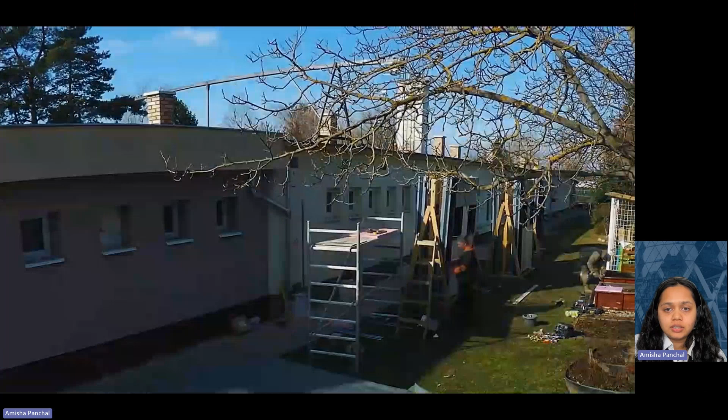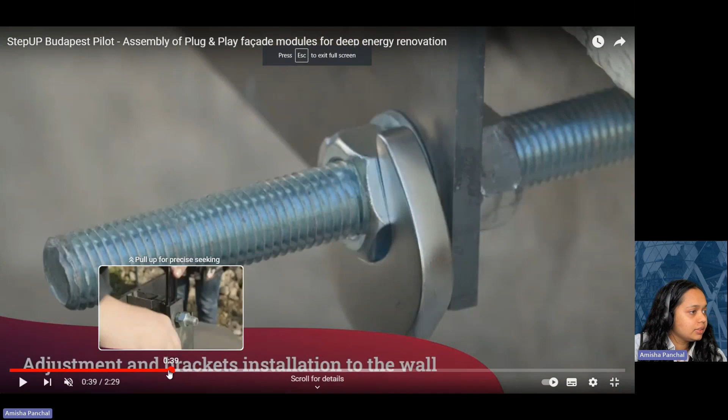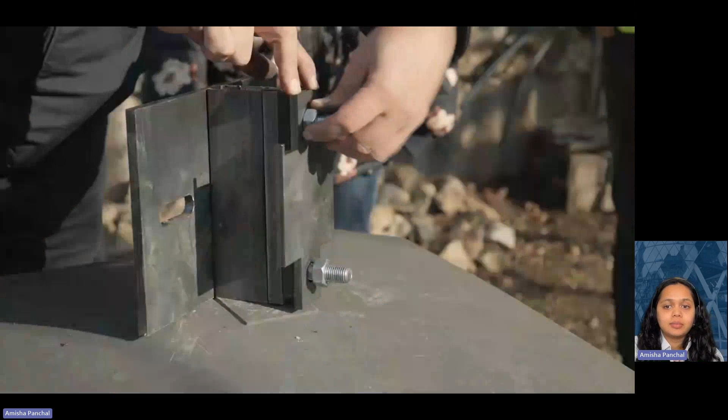The production of sandwich panels and ventilated facade systems already existed. One of our partners, Money Green Tech, already has an expertise in the light steel frame structures, and the combination of the two solutions was never studied beforehand, and it's innovative in the market. So this implies that it must be technically validated with prototypes, which was done in this project.

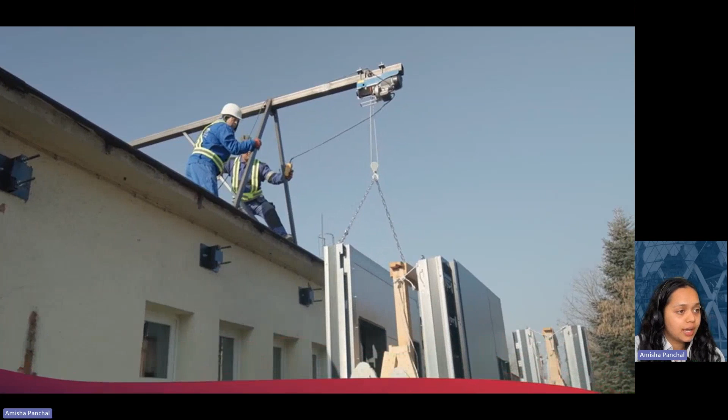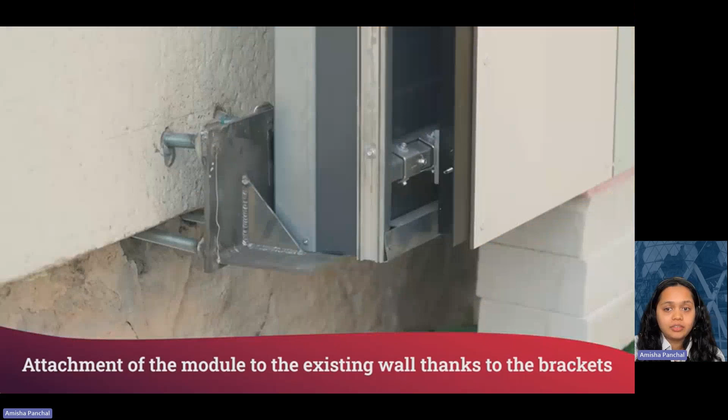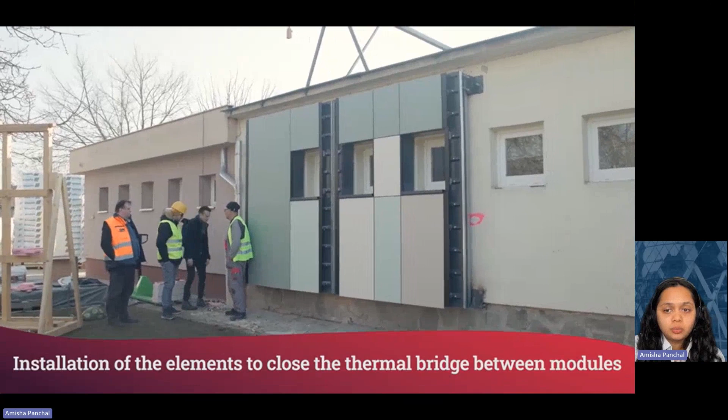This new envelope uses a structure that is provided by our partner Money that can easily be attached to existing slabs of the building without affecting its structural balance. The solution developed consists of the creation of highly customized, industrially produced plug-and-play modules. The two main elements of the solution are the anchoring system and the modular elements, which are the light steel frame structure, thermo-insulating sandwich panels, and an external layer.

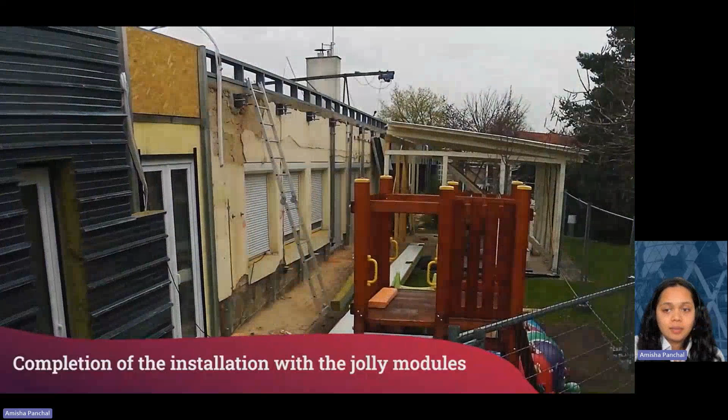The anchoring system has been deeply developed during this project, and it has defined a solution which doesn't only allow the horizontal, but also the vertical movement of the modules and also the adjustment in the direction of the facade. Monitoring systems or electrical or thermal systems with the piping can also be integrated within this facade. So thank you.

Right. So the next system is the plug and play active system. This uses an integrated solution with the phase change materials, like I mentioned before. And it's combined with renewables such as PV panels, commercial heat pumps, and advanced optimization and control logic to operate these charging and discharging of the tanks.

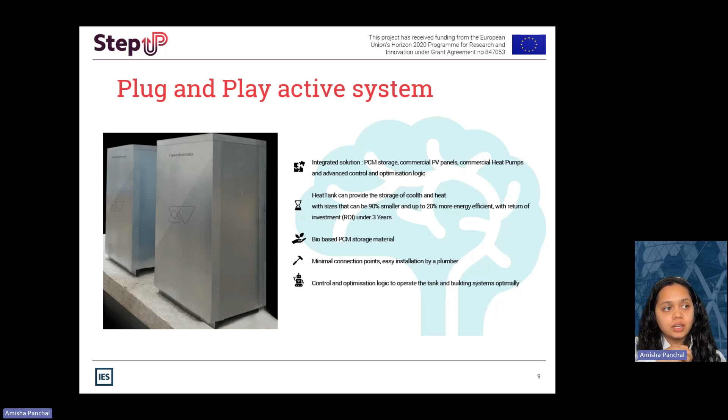The integration and application of these systems are being studied in the project and will be implemented on the pilot sites. And this is aimed to ease the installation time, the installation process, and the data intelligence supports the overall approach of StepUP methodology, which is very much focused on data intelligence throughout the renovation process.

The plug and play solutions are not as adaptable in the market without the technology provider clusters. So these are all the other third parties such as the solar shading and PVs and the heating systems that are already existing, which have the potential to be integrated within these plug and play systems developed in the project. So the integration of the passive systems in the plug and play module has been taken into consideration, as well as the active systems.

So these are suitable for integration with solar shading, windows, and potentially other passive systems. They can be also pre-assembled with or without windows, depending on the project requirements. Currently, we are also able to integrate foldable and adjustable blinds by another third party in the facade. And this kind of solution basically allows slats which can be oriented from different angles and can be moved up and down, achieving a total closure of the window if needed.

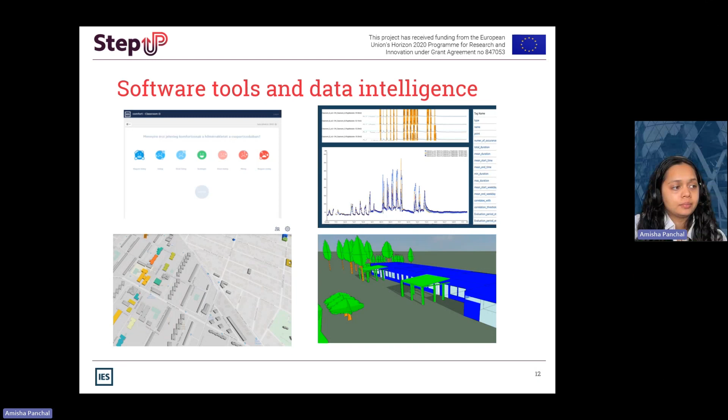Finally, the project develops the concept of smartEPC in deep renovation as an innovative financing model. But I don't want to give away too much information here just yet, as we have the webinar dedicated to this topic. So I will allow this to be discussed separately.

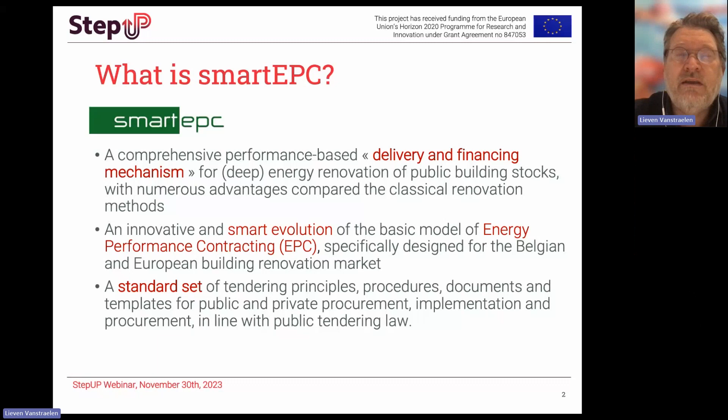In that sense, it's an evolution, a smart evolution, if you want, of the energy performance contracting model that has been around since the mid-80s and mid-90s, even in Europe. But so we added certain features. And what we also did is standardize a lot of the tendering principles, the procedures, documents, and templates to make things much easier, basically.

Technical specs have to be developed to be able to do a public tender or a tender in general. Then measures are being implemented and rolled out. Often they do not include maintenance, so you have to have a separate maintenance contract with a maintenance company. And then if you look at the follow-up, well, very often there is no real follow-up. How much is being saved, if any.

And even though the customer typically can be assisted by an engineering company, you still have all these separate steps with different actors involved, different contracts that you have to find. So there is a lot of lack of alignment between these different steps, and there is no knowledge transfer very often between the parties. And very often, or let's say almost all of the times, nobody is really taking responsibility for the result in terms of the energy savings.

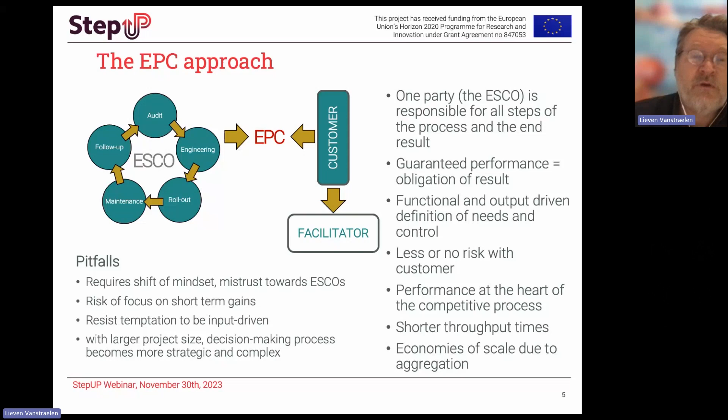So if you look at smartEPC, it's of course EPC, everything around energy performance. But then we've taken it a bit further. First of all, we've defined a whole set of different key performance indicators that the ESCO has to comply with. Has to do with energy, but it also has to do with comfort levels. It has to do with security. It has to do with documentation, with the condition of equipment during and at the end of the contract, and so on.

And basically that corresponds to a fixed price that the customer is paying every quarter or every year to the ESCO. And typically there are energy savings that are then managed with a bonus and a penalty, a bonus and a malus. That's classical for EPC, but we've gone further, also allowing to make the comfort performance bonus malus based. Also building certification, for example, BREEAM or LEED certification, setting targets for a certain level of improvement.

And then we have developed out of the maintenance mechanisms the capability of defining a building value. It's like an in situ building value, a technical value that is being calculated based on the condition scores of the maintenance program, and that allows also then to steer on this building surplus value, aiming for a higher or lower rest value. Basically, that's what it's all about. So these are some of the elements that in smartEPC have been added to the basic EPC model, with different bonus and penalty performance payments.

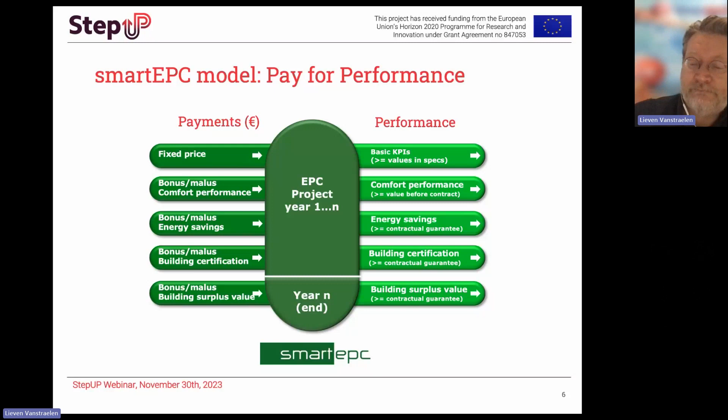So why is smartEPC different from other EPC models? And maybe a few more words on that. As I said, in smartEPC, also the maintenance has been designed to be performance-based. Classically, maintenance is also done with input specifications. So the customer specifies a whole set of things that he thinks need to be done in terms of maintenance. And we figured out that that was just not a good way of doing it. And so we went shopping in the Netherlands, where a standard was developed several years ago, the NEN 2767.

And so, as I said, it works with condition scores. So every element in the building gets a condition score based on this standard, on this norm. And then the ESCO, which acts as maintenance company, has to deliver a certain condition score ranging from 1, which means a very good condition, to 6, which is a very bad condition and you have to replace the elements, throughout the whole ESCO contract. And that's a significant difference. And it also leads, of course, to much more proactive maintenance, and of course also the corrective maintenance if needed.

It's also very much designed around and based upon total cost of ownership. So we're not just looking at costs. And also in public tenders, very often, public users will focus on how much something costs. We're not doing that. We're looking at the costs, investments, maintenance, maybe financing costs, but we're also looking at the energy savings. And it's the total cost of ownership in terms of the costs, and then the benefits, which are the guaranteed savings. And we're looking at the full picture over the life cycle of the project or even the life cycle of the building.

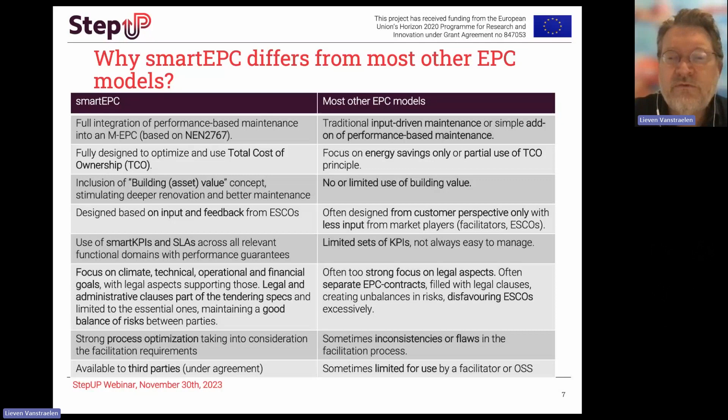Another part is that all the administrative and legal aspects are serving the goals of the performance contract. And so we integrated those into the specs, rather than having a separate legal contract, which often then turns out to be a big hassle for parties to agree on. If you have 100 pages of legal clauses, that doesn't work very well either. And there's a strong process optimization that we try to get into the facilitation process.

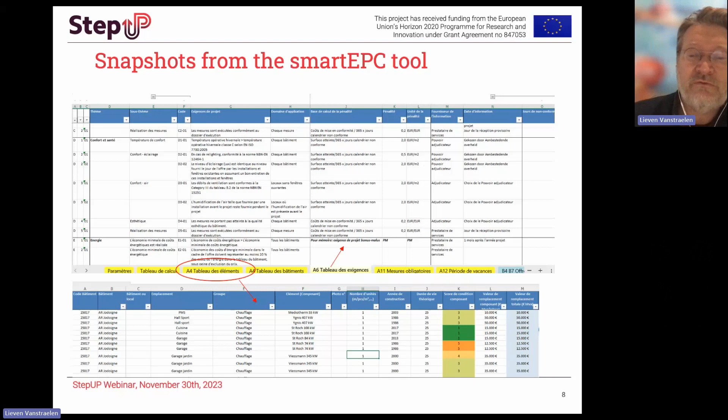So what are and have been the challenges for deep renovation? Because that's what we try to do, of course, in StepUP, is go also a step further. We had some experience with deep renovations, but not so much yet. And the first one is to integrate the architectural and material requirements into what is, as I said, basically a functional and a performance-based specification.

When you replace a boiler by a heat pump, the idea is that you're not so much concerned about what this heat pump looks like and which specs it has. It's important that the energy savings that the ESCO is guaranteeing are there, and that the comfort is being delivered by the installation. And so the ESCO has all of the incentives to pick good equipment, because if he has to manage the installations for the next 20 years, he's not just buying some cheap equipment.

But now you are talking about replacing windows, you're talking about finishing maybe roof insulations. And so there's a lot of practical and visual aspects that you have to integrate that were not there when you did only shallow renovations.

It also means that we have to go beyond the original concept of EPC and even the first versions of smartEPC, because we have to look much more at those multiple benefits, because they are part of making the business case. It's not only, as I said, going to be anymore the idea that savings pay for the investments. You have to now invest more, and you're not getting that return on investment. So you have to motivate it by other multiple benefits, and set also expectations in that sense. And so that's a challenge as such. So that's why we go further in managing those multiple benefits.

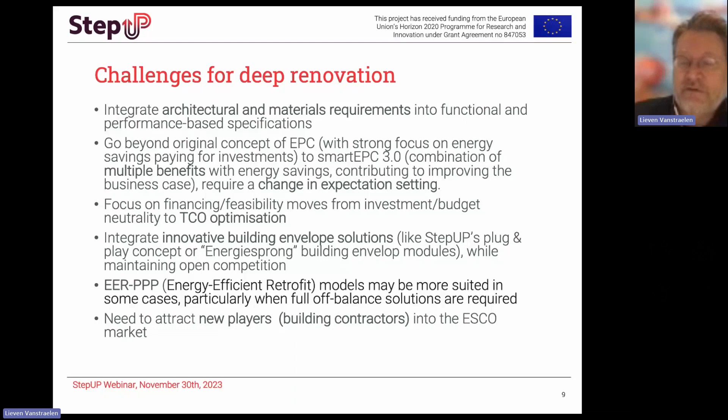And then off-balance solutions, because we know now that a lot of public authorities don't necessarily have the money to invest or cannot necessarily borrow that money. So there are also innovative solutions we've been working on to keep things off balance. And of course, attracting new players, people that are capable of implementing such building envelope renovations, into the ESCO market. And that's one of the things we're doing with the Belgian ESCO Association.

So what has been implemented in smartEPC in terms of deep renovations already? Extending the building value concept, so to integrate longer term contracts. A couple of years ago, contracts were 10, maybe 12 years. Now we're moving into 20 years, even longer. Next projects will be even 30 or 40 years. And of course, developing also and working on integrating existing renovation models.

One of the things we did is we disconnected the contract duration from the payback times. Before, you would have a contract and it would have like a 14-year payback time, and then we did a 15-year contract. And that's how you also got to the investment neutrality, for example, getting investments being paid by savings. Now that's not the case.

Sometimes we will have projects, and it's already happening, where you have 60-year payback time, for example. But we're not going to sign 60-year contracts. We may sign a 20-year or 25-year contract on a 60-year payback time. So we are disconnecting both.

And then developing new libraries of standard technical requirements. As I said, you cannot only do performance-based anymore. You have to define certain minimum technical requirements, particularly on the building envelope. And so we have been developing those.

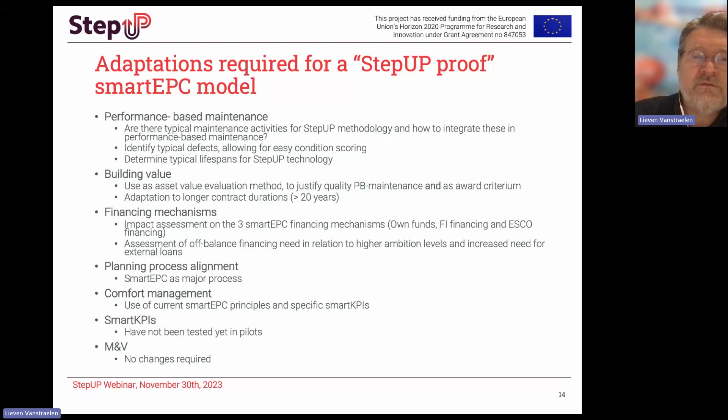And then finally, what we did is we applied this to some extent to pilot projects and to the technology partner clusters, and also looked at, okay, what's the status in different countries? How mature is the market? What are some of the barriers or the opportunities to implementing smartEPC with StepUP in different countries, not only the pilot countries, but other countries too?

And so we did some surveys, trying to understand better what's the status of market development. Is there already performance-based maintenance and so on available in different countries, and assess basically those market conditions. And we looked, of course, at different types of buildings, different types of technologies, and different types of KPIs.

Some conclusions. First of all, we think that we were able to at least partially validate the conditions for developing the smartEPC model, integrating these key elements of StepUP. It's not as if we can now say we can steam ahead in every European country with smartEPC and doing StepUP renovations. There's still some development work to be done, but at least the principles and the concepts have been validated to a high extent, with some additional work to be done.

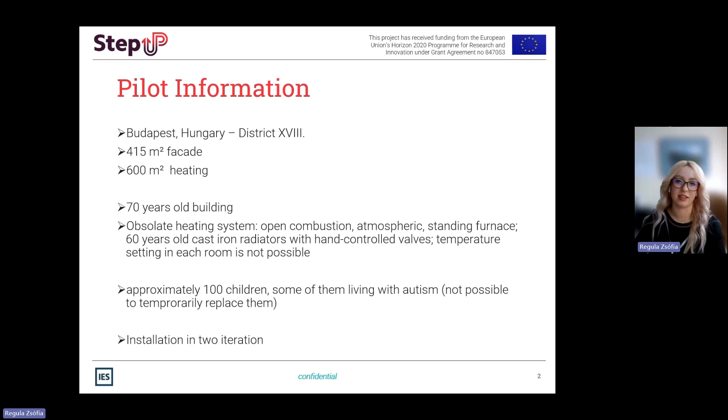To tackle this complex issue, we implemented a two-phase approach using the innovative StepUP methodology. Our selection process, facilitated by the portfolio overview tool, led us to Zöldliget Kindergarten. So it was a representative case highlighting the urgent need for deep renovation in public buildings.

So this method, the portfolio overview tool, basically displayed the overall picture of our district's buildings, ranking them by their current condition and how much they need renovation.

So we also introduced data intelligence by incorporating an array of sensors, including carbon dioxide, humidity, and temperature sensors within the classrooms. And these, coupled with the technology that tracked the opening and closing of doors and also the windows, played a pivotal role in our project.

By analyzing the data that we collected, we were able to devise a heating and cooling schedule that not only can enhance energy efficiency, but also can significantly improve the overall comfort level in the kindergarten. This approach allowed us to monitor and measure the impact of our renovations with much precision.

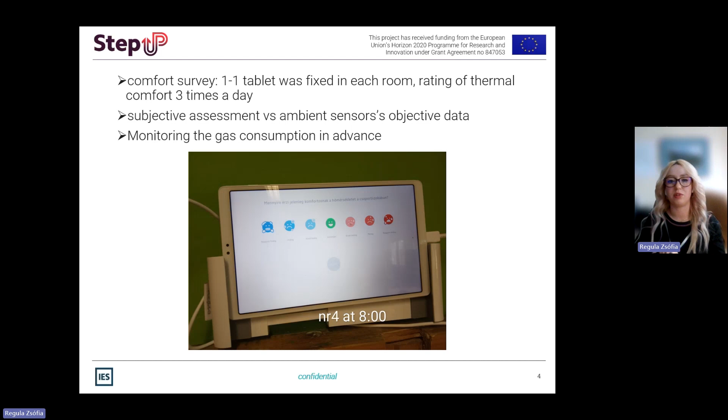And by comparing this subjective assessment with the ambient sensors' objective data, we were able to calculate the total comfort experience in the kindergarten. And simultaneously with this, we started to measure the gas consumption well in advance. So it provided us valuable insights into the project efficiency.

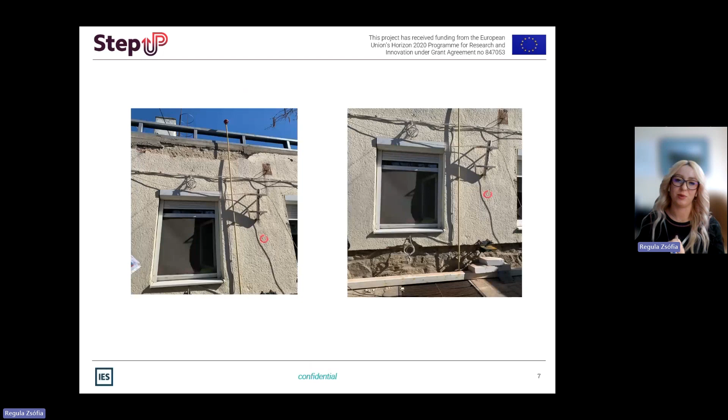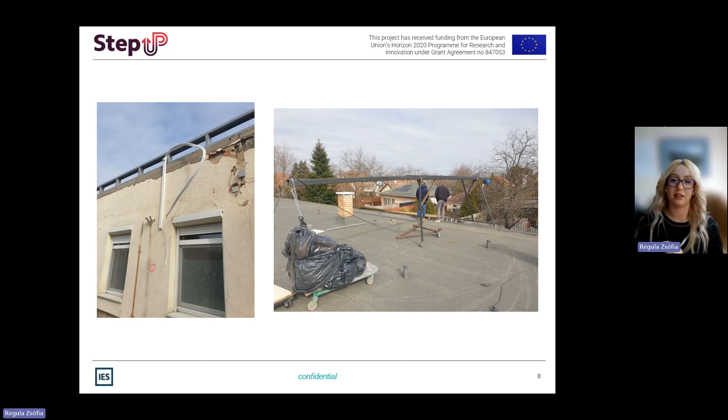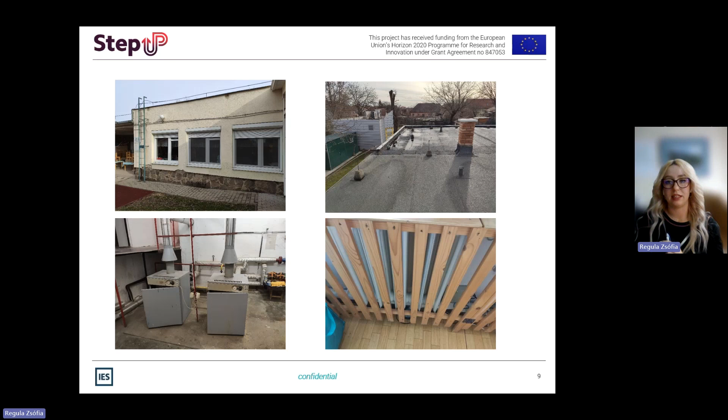Okay, so here I'm going to present some pictures of how the kindergarten looked before the renovation. It may seem nice at first glance, but the kindergarten's walls were weathered and worn down. A critical concern was the heat loss on the facade and on the roof, rendering the building an inefficient energy consumer. The walls were all cracked and very unstable, and without proper insulation, they basically left the interior exposed to the external elements.

So in the first phase, we introduced the plug-and-play envelope system with laser-measured prefabricated wall insulating modules. And later the roof also got traditional insulation, but it was not a direct part of this project.

So after several preparatory works, such as dismantling the entrance canopies, relocating the terrace pergolas, and raising the wall height of the main facade with a steel structure, the first step was to measure the location of the panel fixing brackets, and then we fixed them on the facade.

During the planning phase, the experts carried out several measurements to verify the load-bearing capacity of the walls. And we also tested the load-bearing capacity of the roofs before putting on the solar panels. And after that, the prefabricated thermal insulation panels were installed, and they were provided by Manni, which Amish mentioned before.

And to eliminate the thermal bridges, the contractor closed the door and window junctions with additional mineral wool insulation, and then closed that with an HPL sheet.

Okay, so as you can see on the pictures, the outer covering was provided by a colored cut-to-size HPL plate, and it is attached to aluminum profiles with pop rivets. And also the windows were given uniform metal elbows.

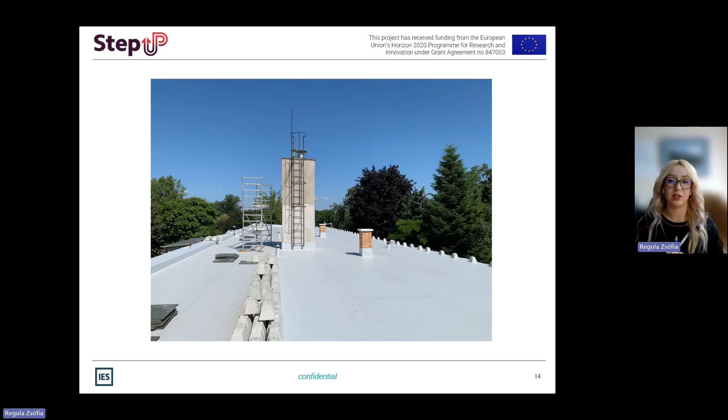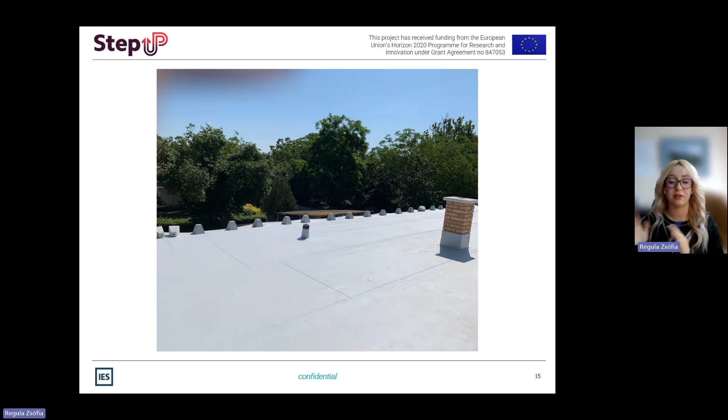So thanks to this technology, the number of on-site work processes can be minimized, and the need for human resources is also reduced. So the contractor can get things done so much faster. And this technology not only saves time, but also reduces disturbing environmental factors such as noise and dust created by the renovation. And by using this prefabricated solution, the risk of errors arising from on-site construction can be minimized, since the individual elements are made in a factory under conditions subject to a strict quality control.

So this initial step laid the foundation for a more sustainable and comfortable environment. This was all achieved using the Lean tool, which is also part of the StepUP methodology. With Lean, we measured a lot of things, their time on site and the amount of incorporated material. So it was basically a new platform for communication and transparency, ensuring minimal disruption to the kindergarten's operation.

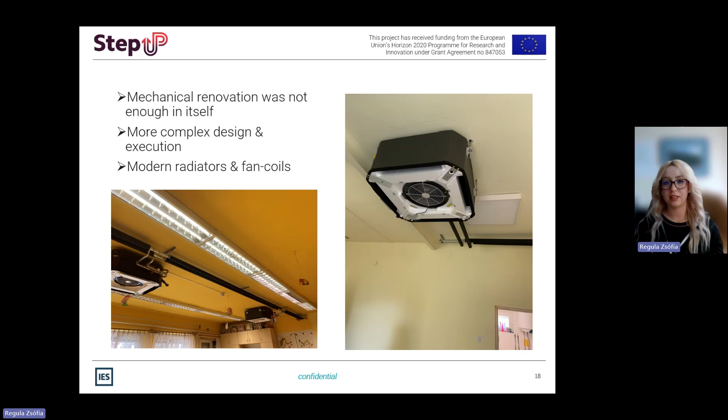So the electricity demand of the plant heat pumps will be provided by solar panels, and as a technological innovation, an intelligent thermal accumulator system will also be installed. So this phase is still in progress, but thankfully both the contractors and the leaders of the kindergarten are very collaborative at this moment. So this phase will likely end at the end of January.

In conclusion, our pilot project is, I think, not just a renovation, it's a testament to our commitment to sustainability, efficiency, and most importantly, the well-being of our community, including the children who depend on us. Although smartEPC wasn't a direct part of our pilot, I believe that the incorporation of this tool into future projects can not only improve the financial robustness of the business case, but also can reinforce the commitment to sustained benefits, effectively bridging the gap between empty promises and an enduring real-world impact in the realm of deep energy renovations.

As Livia mentioned before, the traditional route of choosing the right candidate, the right contractor, and then signing the contract can be really long. So in our case, we had public tendering during our pilot, and I firmly believe that it would have been much quicker and more efficient with the integration of smartEPC.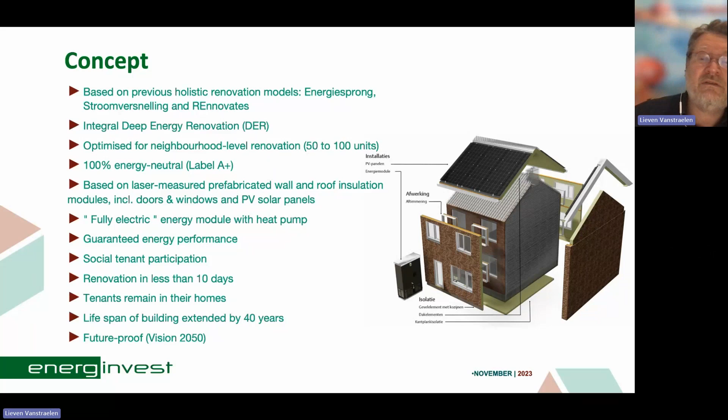But the renovation was done in less than 10 days. And that's, of course, much shorter than a traditional renovation. It means that the tenants could remain in their homes. And we basically extended the lifespan of the building by another 40 years, which makes it a really more future-proof Vision 2050 project.

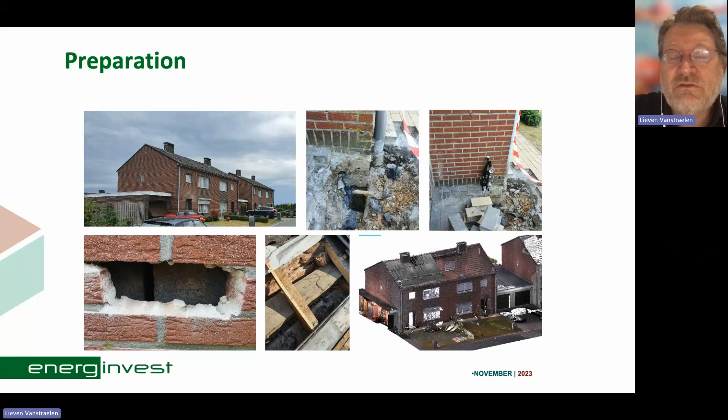There's, of course, some preparation done here in terms of making sure that the panels can be installed. There were some non-destructive and destructive tests done on the facade, making sure that it can carry the weight of the panels. The same thing for the roofs, where the existing tiles had to be removed. We had to check if the existing wood structure was sufficient. Of course, there were the specifics of the garage, which made the installation a bit more complicated.

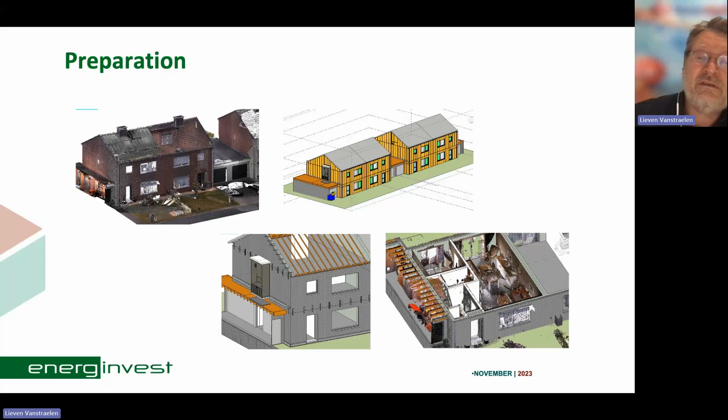You have to avoid the problems with the differentiated thermal insulation. And then, of course, everything was measured via laser and designed in the factory for fabrication of the panels. There was some preparation. Here on the left side you see the roof of the garage that didn't have to be insulated, but we had to ensure that there was no water infiltration risk, and then prepare a small system to carry the cabinet that contains the heat pump.

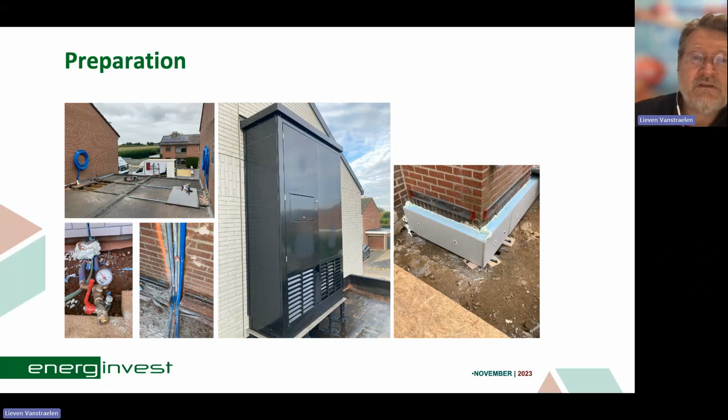So the heat pump is placed in this cabinet on the outside of the wall on the first floor on top of the garage. And of course, some cabling also had to be foreseen. These pictures show the facade panels. So you see here half of the facade.

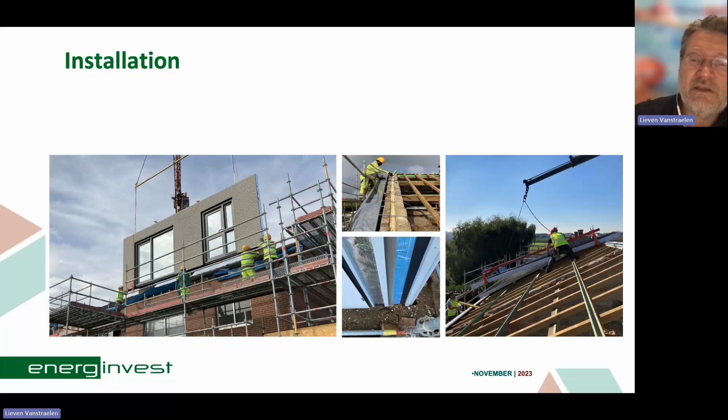The bottom floor facade panel is being installed with a crane. Same on the right side with the roof panels. And it's this type of installation, very similar to what the StepUP implementation in Hungary has done, again with larger panels. This is a view from above during the installation.

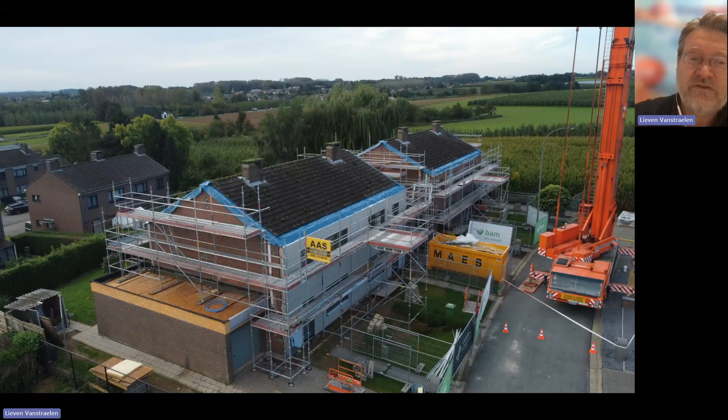You see part of the panels already being installed on the front facade of the first building. Of course, the others still being done. And it's also a very much contained construction site or renovation site at this stage. Other neighbors have little problems with the works that are being done. Here you see how the facade panel is being lowered onto the fixation system.

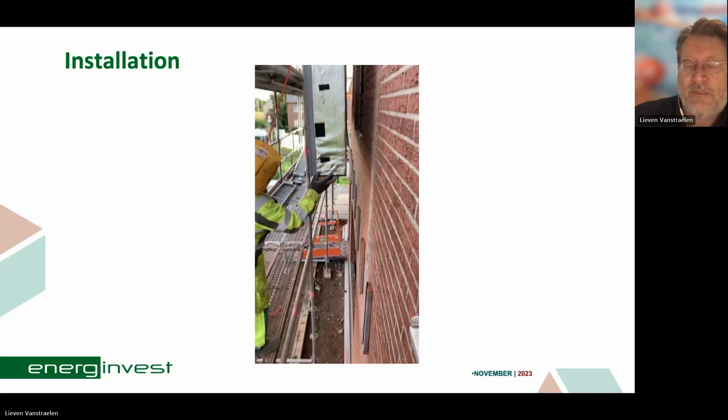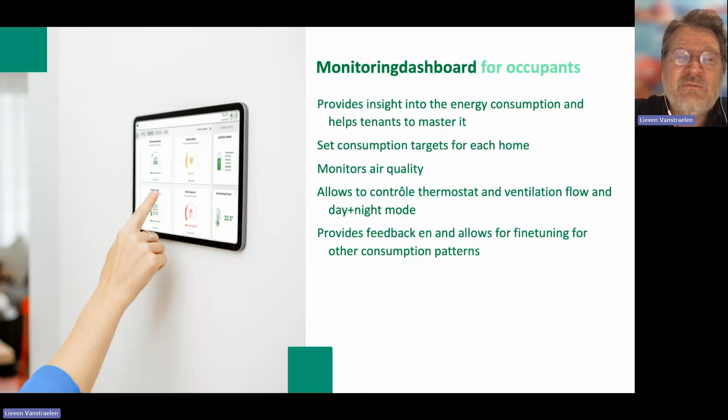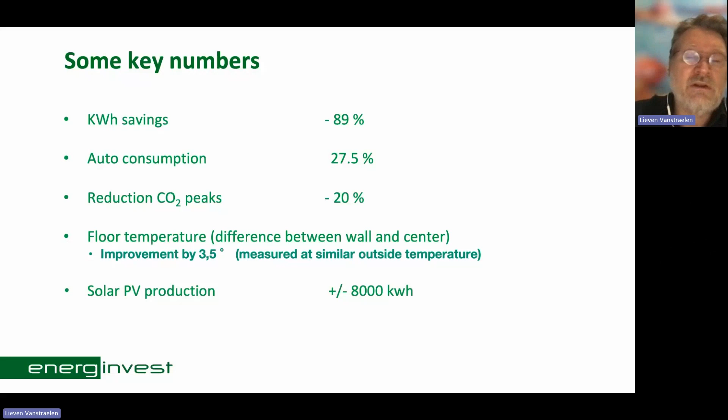And then just a few numbers. So on this project, you see 89% kilowatt hours final energy savings. So that's where we're very close to a full integrated renovation with a much higher ambition level, and that's where you reach the level A. 27.5% auto consumption with the PV panels. Also, CO2 peaks are being reduced by 20%. There's a significant improvement also in floor temperature, measured here with the difference between wall and center, at similar temperature before and after renovation, and an estimate of the solar PV production around 8,000 kilowatt hours.

Financially, some data maybe: the current sales price, if the social housing company would have to sell the house, it would be worth around 168,000 euros, to give you an idea. And the annual rent income for the housing company is close to 4,000 euros. They also have a current maintenance cost of 735 euros, of which the tenant himself is paying 222. The tenant, of course, is paying the energy bill, which today was around 2,528. This is an average, of course, because the 4 buildings had slightly different energy bills.

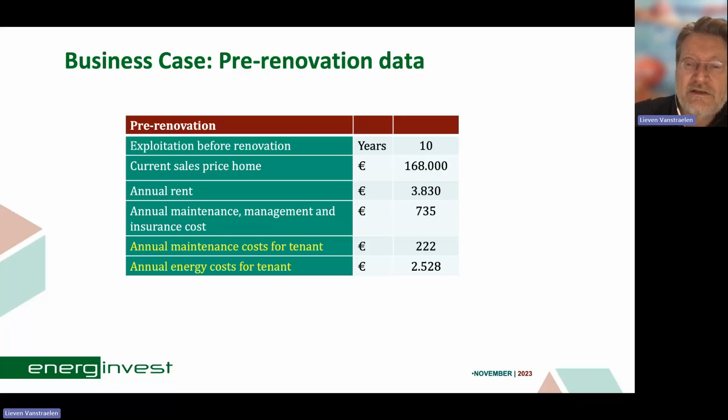If you look at the investment, doing this renovation this way per home was 123,451 euros. Now, if we would have to do this renovation to what we call an E50 level, so basically level B, it would be cheaper. Let's face it, around 80,000 euros. But then you would have to redo it again in 20 years' time.

And if you would have to do it in this way in 2 steps, then the total renovation cost would be much higher. You would end up somewhere around 250,000. So you could almost do this renovation for half the price in 1 step, rather than doing it in 2 steps. Of course, also with the price evolutions, what you have to pay for in 20 years. Subsidy-wise, that would be similar.

And so you see that the net present value of the renovation is about 25,000 euros compared to 1,600 in the simple renovation case, and even negative in the 2-step. Of course, that takes into account also the improved real estate value. But of course, eventually, it's not the goal of a social housing company to sell all of its homes. Some of its homes will be sold, maybe even to existing social tenants. But in the end, that's not the goal.

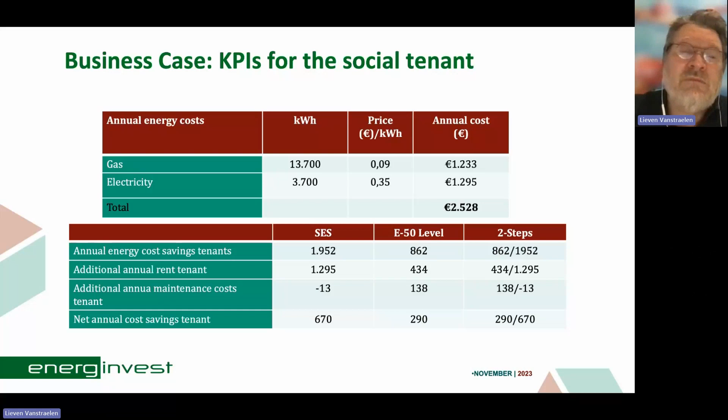So putting all these numbers together, you see that it's a real win-win situation for the social housing company to do such renovations, but also for the social tenants. And so, of course, now the government has to decide and look into deploying this type of renovation on a much larger scale. Maybe starting with a first full neighborhood renovation, and then maybe to other cities and other social housing companies.